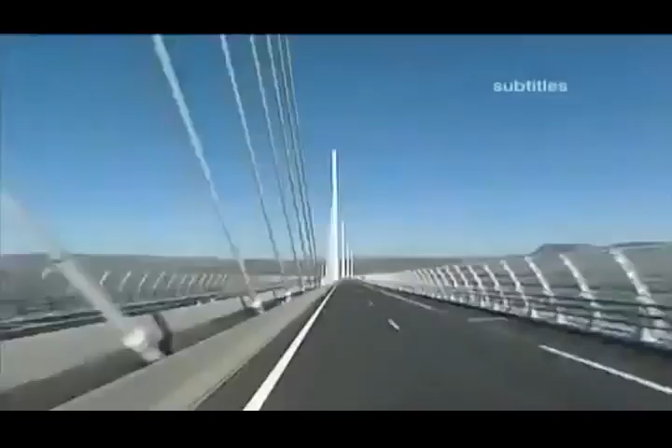This is the Millau Viaduct, the tallest bridge in the world. Its highest tower stretches a staggering 343 meters. You fly across this bridge. Literally, you are above the clouds. But this is a megastructure they said couldn't be built. When I first showed the drawing of this bridge, they really thought I was crazy.

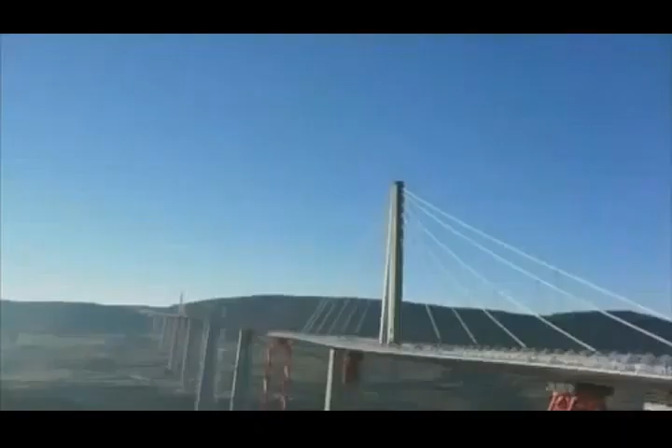The team attempting to build this amazing freeway in the sky had to survive landslides, fight winds gusting at 130 kilometers an hour, and weather massive storms as the bridge simply hung in the balance. It's a bridge that pushes the boundaries of engineering to the limits, and then beyond.

Imagine building a series of Eiffel Towers, then slinging a 4-lane highway between them, all the way across one of the deepest valleys in France. Impossible though it sounds, that pretty much describes the building of the Millau Viaduct.

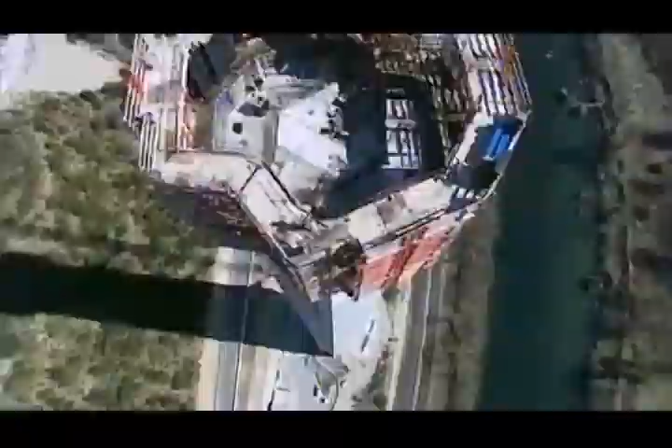From the start, the construction team faced 3 daunting challenges. 1. Build the tallest bridge piers in the world. 2. Put a 36,000-ton freeway on top of them. And 3. Erect 7 steel pylons, each weighing 700 tons.

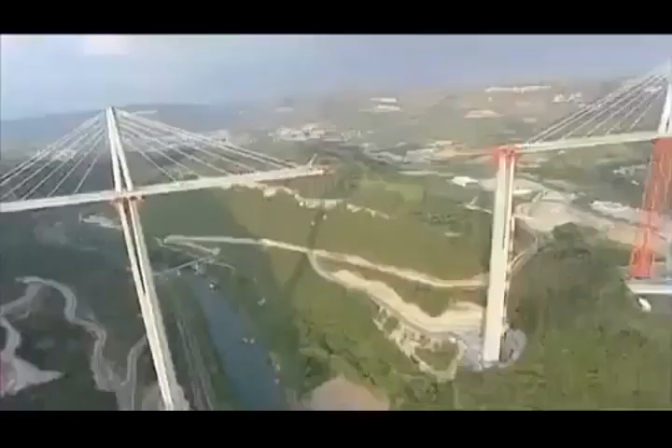And what's more, they had to do this hundreds of meters above solid ground. So high that if you're on the 86th floor observatory of the Empire State Building, you'd still be looking up at this amazing bridge.

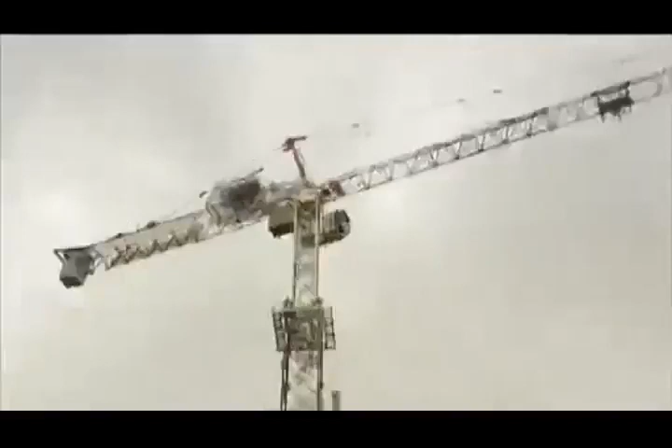October 2001, the team break ground. They're required to build a bridge that will last for 120 years. And to win the contract, the team promised to build it in record time, less than 4 years. To up the ante, any delay will cost them $30,000 a day in penalties.

There are 7 piers that are numbered from the northern end of the valley. Number 1 will pose problems because of the steep slope. Number 2 will be the biggest challenge since it's the tallest. Crossing the river, number 3 is not much shorter. Then 4, 5, 6 and 7 find the gentler slope to the south.

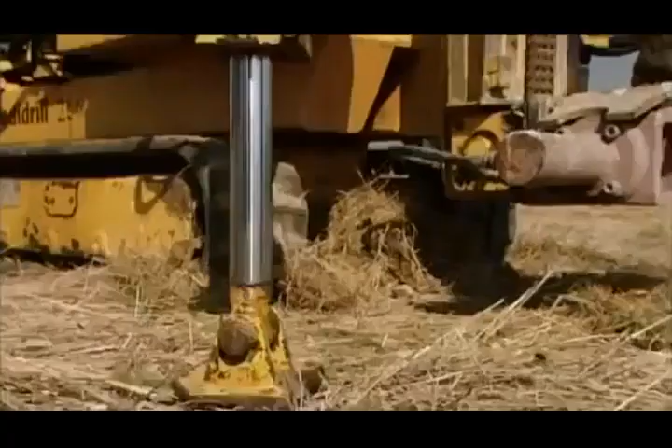To begin, the team had to bury the foundations deep in the bedrock in order to support the enormous weight the bridge will place on them. But the forces of nature were stacked against them. Geologists have warned of the risks posed by the region's fractured limestone. The rock is full of cavities, cavities that are essential to the local cheese economy.

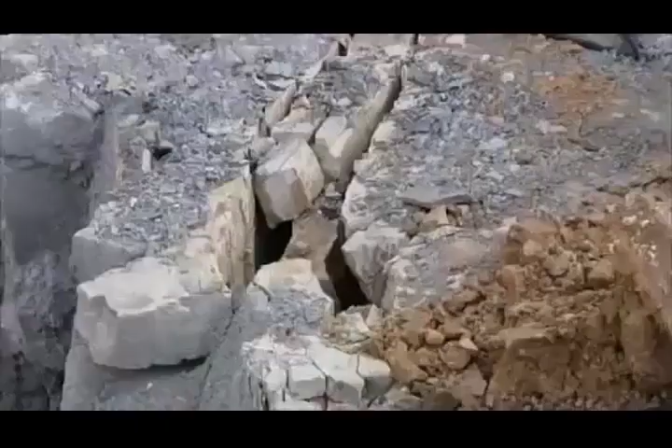These cave systems, close to Millau, are home to a unique bacteria responsible for the blue mold in the world-famous Roquefort cheese. But what's perfect for cheese could be disastrous for a megastructure. The geologist's diagnosis spelt one thing: landslides. This kind of catastrophe could jeopardize the entire project. Despite the warnings, building went ahead as planned.

Then, well into construction, as predicted, a dramatic storm causes a landslide. 4,000 cubic meters of rock collapse around Pier 1. Fortunately, the fallen rock doesn't damage the pier, but the warning is clear. They're forced to divert precious manpower and equipment to stabilize the slope and prevent a repeat collapse.

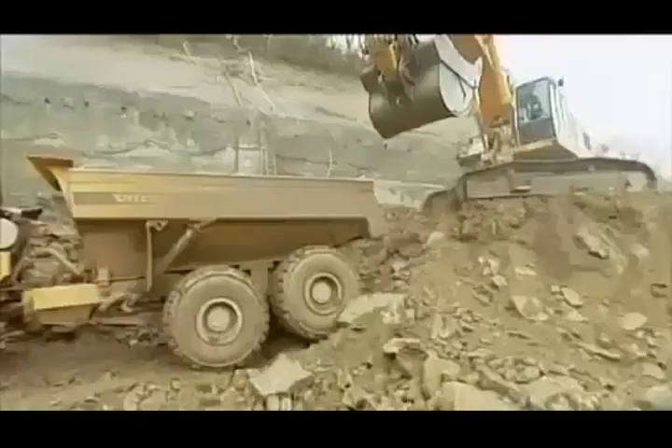So if the area is prone to landslides, why did they build the world's tallest bridge here in the first place? The answer is simple. In the 1980s, France built a freeway linking Paris directly with Spain. This major artery headed south across the French countryside, while from the Mediterranean, the freeway headed north, until they both hit one of the deepest valleys in France and stopped dead.

Welcome to Millau, France's least favorite bottleneck. The town of Millau is in the mountainous region of the Massif Central, one of the most tranquil parts of France. But in summer, this poor medieval town suffered traffic hell. The locals couldn't take it anymore. Neither could their mayor. It was terrible for our reputation. When you hear every day on the television and radio, avoid Millau, there's a traffic backup, a 5-hour wait in Millau.

It's clear the bridge was needed. But it took the French government a very long time to get round to building it. 12 years before construction began, up in Paris, the Ministry of Transport first came up with a plan. Their head bridge builder, Michel Virlogeux, is no ordinary engineer. He's a man who thinks big, very big.

France's Millau Bridge would not only be the world's tallest, it would be unlike any bridge ever constructed. When I first showed the drawing of this bridge to the authorities, they really thought I was crazy. Virlogeux's Normandy Bridge has 2 sets of cables supporting the deck. But he wanted to up the stakes for Millau by losing 1 row of cables, so the remaining line would be forced to do twice the work.

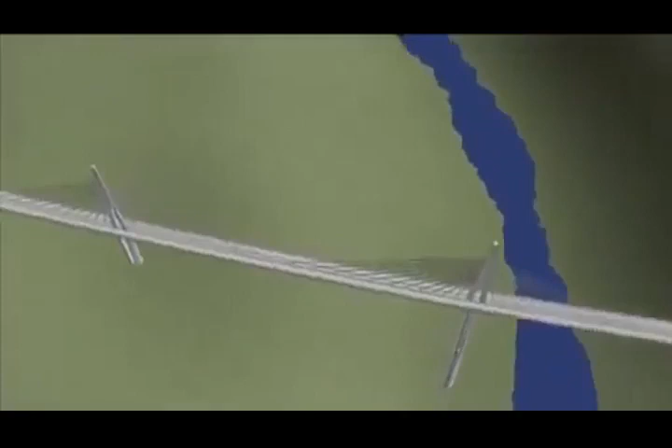More dramatically, the 2.5-kilometer Millau Bridge, instead of having a single main span, needed a whole series of piers to support it across the valley. No one had ever attempted a multiple-span, single-line cable-stay bridge on this scale before.

The French authorities had a problem. Nervous about Virlogeux's groundbreaking scheme, they held a competition inviting other engineers and architects to compete with different designs. The winner, Lord Norman Foster, is one of the world's superstar architects. In Hong Kong, he built the world's largest airport terminal. In Barcelona, offices literally hang from a mast on his communications tower. This is a man who regularly contemplates the impossible and delivers.

You know, it's the challenges. And it's one challenge on top of another, on top of another. And with Millau, one of the biggest challenges was making it fit into the landscape, given it's just down the road from the famous Gorges du Tarn, France's equivalent of the Grand Canyon. How do you make something which has to be so immensely strong against the forces of nature look very gentle, very delicate? How do you weave something on that scale into the most unbelievable landscape?

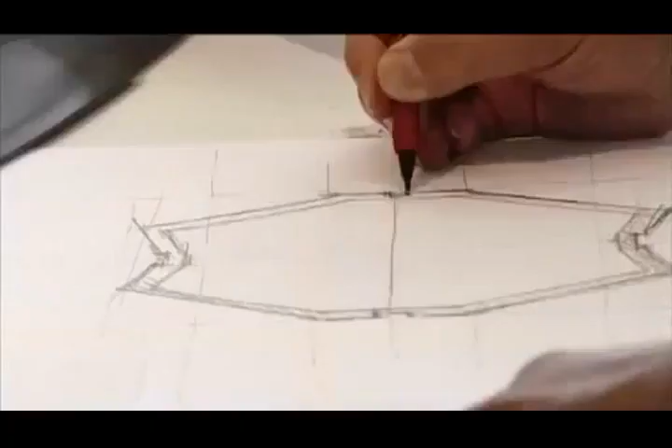Ironically, Foster's answer was to take Virlogeux's pioneering scheme, then push it 1 stage further. He turned an elegant piece of engineering into a delicate work of art by boldly cutting out 2 of the 9 original piers and seriously slimming down the remaining piers and road deck. Foster wanted the bridge to appear as delicate as a butterfly. But this butterfly has to support the weight of 5 Eiffel Towers in gale-force winds hundreds of meters above the River Tarn.

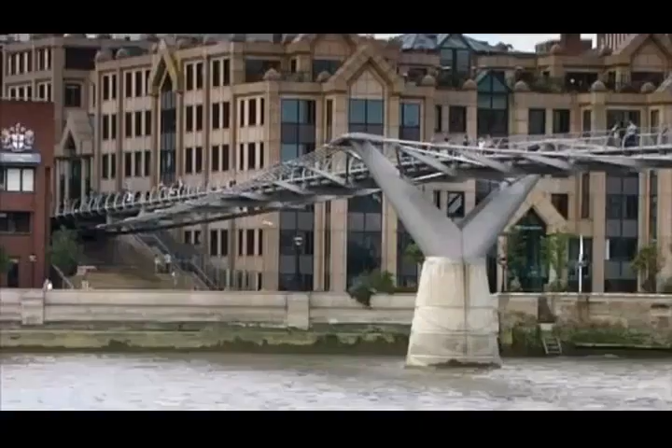Then, with Millau still on the drawing board, Foster's record as a bridge builder suffered a major setback. His Millennium Bridge in London is actually another record-breaking structure, the lowest profile suspension bridge in the world. But when this footbridge opened to the public in June 2000, it was a public relations disaster. Crowds walking over it set up a resonant frequency, and the bridge began to sway. As people adjusted their step to the small initial wobble, the effect was magnified.

Though it didn't threaten the structure, the swinging motion became so dramatic, the authorities closed the bridge for a refit that took 1.5 years and ended up costing over $8 million. It was a bad omen for the Millau Bridge, where construction was soon to begin. And at 15 times the height, a design flaw would be a catastrophe.

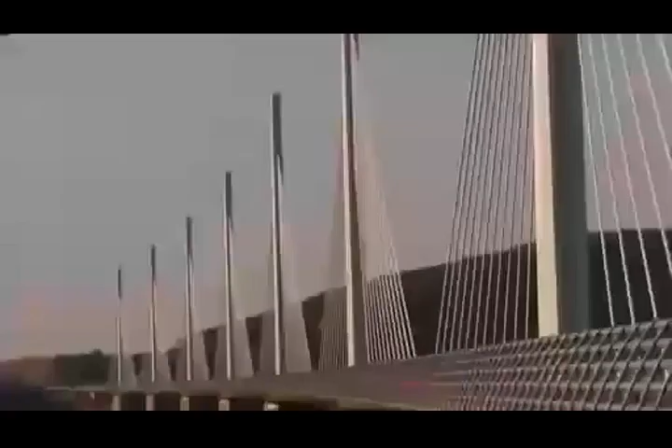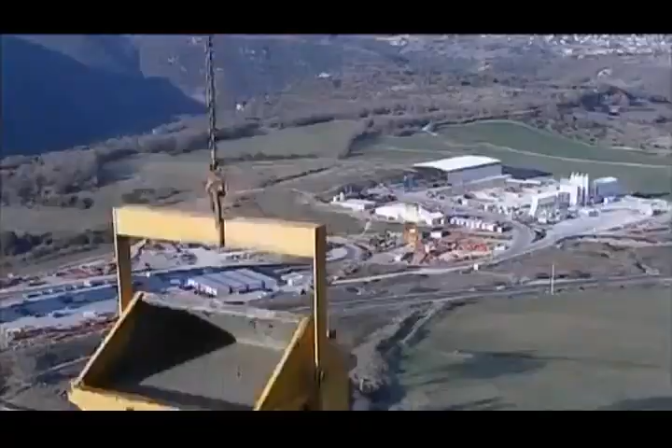December 2001, France's Millau Viaduct, the tallest bridge in the world, is under construction. Everything about this project is supersized. It'll need 200,000 tons of concrete, so much that the team have to build a concrete factory on site. But there's nothing straightforward about this concrete. The formula must be just right. It needs structural strength to support the massive loads it'll have to bear. But it can't set too quickly, as it has to be hoisted into position and poured hundreds of meters in the air. And it needs to be just the right color to suit Norman Foster's vision.

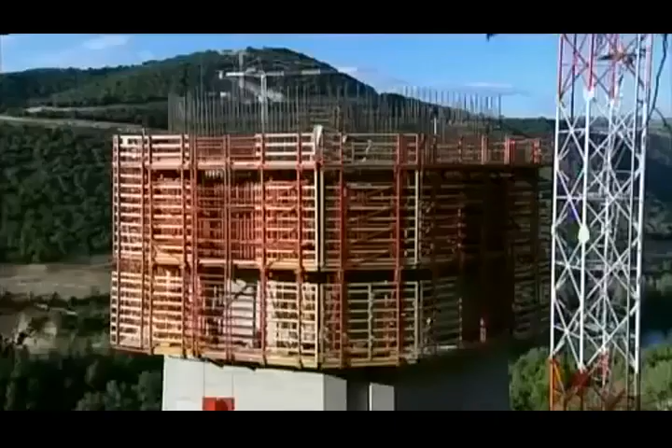In fact, the architect's vision has created a headache for the construction team. He's designed each pier as a complicated geometric shape, tapering the entire way up with vertical grooves set into them to create shadows. But what's just a line on paper for the architect was a major challenge to build. The enormous piers are built step by step by pouring concrete into a temporary mold. To give the required strength, the molds are filled with a frame of steel reinforcing bars. In total, 16,000 tons of these steel bars are hoisted into place and secured. Laid end to end, they'd stretch the 4,000 kilometers from Millau all the way to Central Africa.

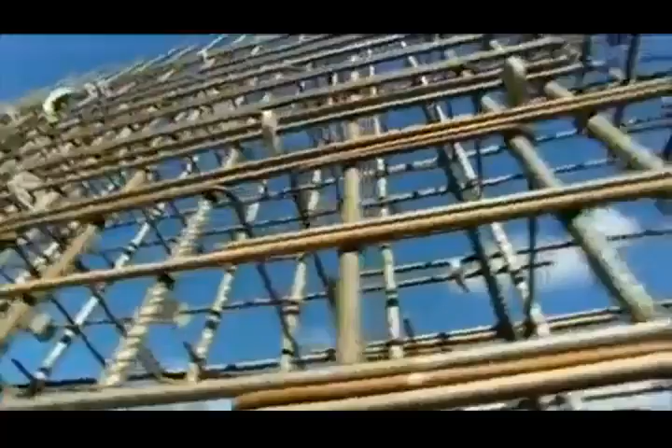The shape of each pier is seriously complicated. As a result, each time they remove the sections of red steel shuttering, they have to change the shape of the mold to fit the profile of the next 4-meter section. Manhandling these steel panels weighing up to 15 tons apiece is no picnic. And with the combined height of the 7 piers totaling well over 1 kilometer, they have to change the shape of the mold over 250 times.

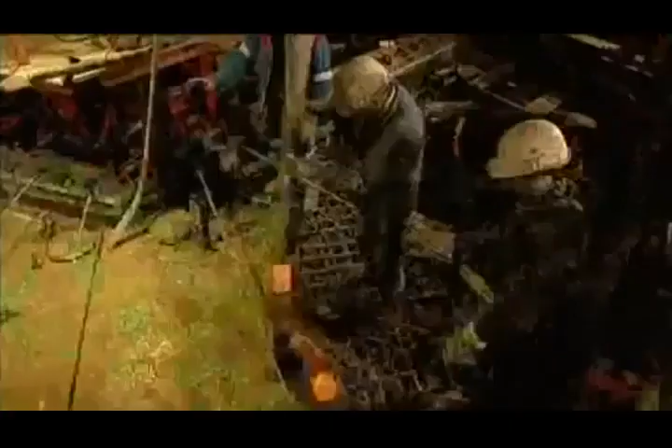Every 3 days, each team on each pier went through this whole cycle. Then they repeated the process. But it was a race against time, with a permanent threat of delay. Keeping the entire build on time and to budget was the daunting responsibility of one man, Jean-Pierre Martin.

If instead of 3 days we took 4, imagine that multiplied by the number of castings. We'd end up with a 3 or 6 month delay. With a penalty of nearly $1 million a month, this isn't something Martin wanted to contemplate. And this schedule wasn't his only headache.

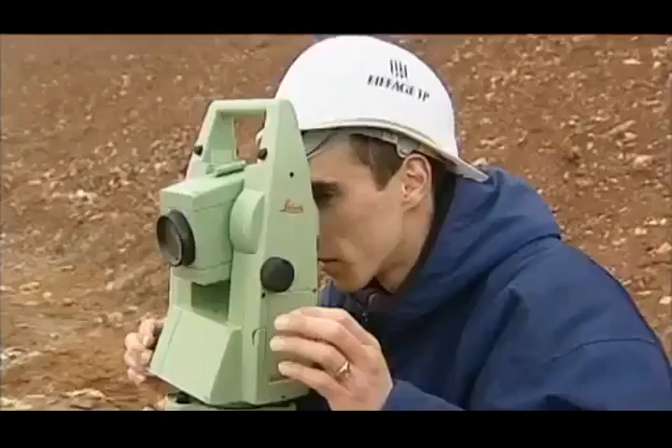You have to be pinpoint accurate when you're building the tallest bridge piers in the world. Get it wrong, and the bridge simply won't fit together. Just 10 centimeters out, about a hand's width on each 4-meter section, and the tallest pier could be 6 meters off at the top.

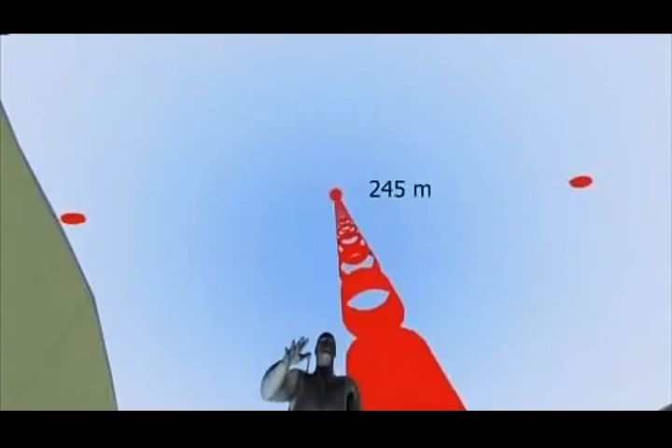Each team was aiming for a specific point in the sky. For Pier 2, this was exactly 245 meters above the ground, 546 meters from the north side, and 1,914 meters from the southern end. There was no room for error.

The only chance they had to get it right was with GPS, accurate to within 4 millimeters. Using signals from multiple satellites, the team could pinpoint their position and make sure they're on target for that critical point in the sky they needed to hit.

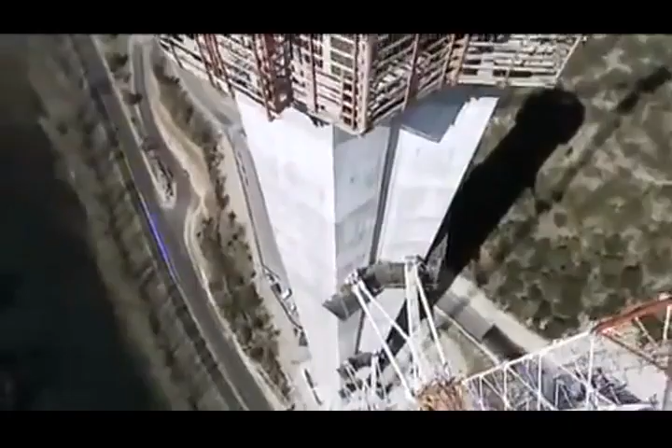Month after month, the piers climbed higher. Finally, by November 2003, they reached their full height. At 245 meters, Pier 2 becomes the highest bridge pier in the world. But is this record-breaking pillar where it's supposed to be? Amazingly, it's dead on target to within 2 centimeters.

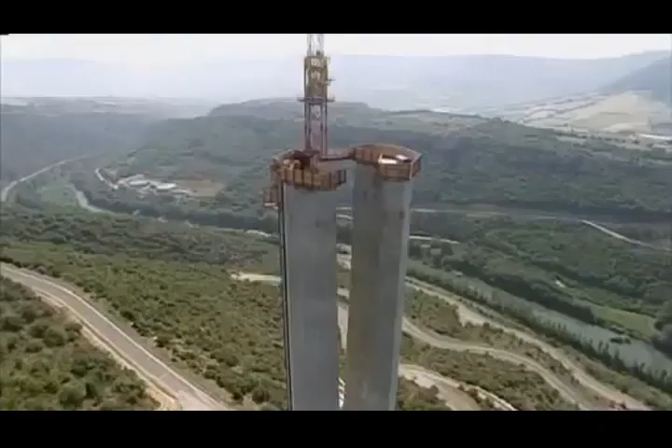Champagne corks pop. It's time for a major celebration. Against all the odds, they were 1 month ahead of schedule, but the team couldn't afford to relax. The next stage of the project would be the most difficult part of the build.

Phase 2 of building the world's tallest bridge involved putting a 2.5-kilometer roadway weighing 36,000 tons on top of the piers, a full 270 meters above the River Tarn. Bridge builders know danger comes with the territory, but working at these heights can be lethal.

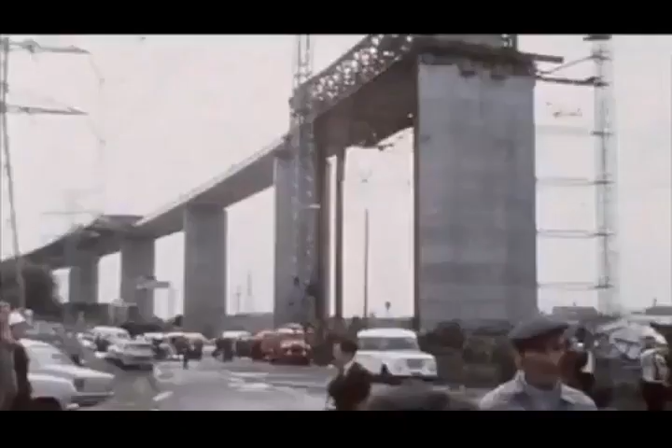More than 34 died constructing New York's Brooklyn Bridge. 35 died in 1970 on the Westgate Bridge in Melbourne, Australia. And 1 year later, 13 workers were killed when the Koblenz Bridge in Germany collapsed into the Rhine.

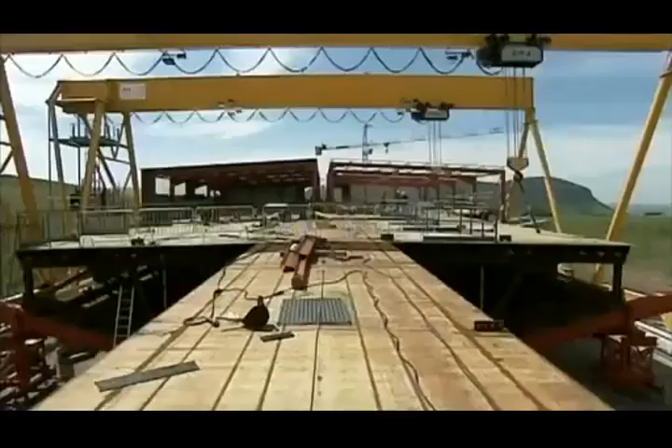With these fatalities in mind, the team decided to fabricate the entire road deck on the safety of solid ground. This meant building it in steel, which in theory would be much safer than lifting vast concrete sections hundreds of meters into position. There's only one problem with this plan. No one had ever put a road deck on piers anything like this height before, let alone over a 2.5-kilometer span.

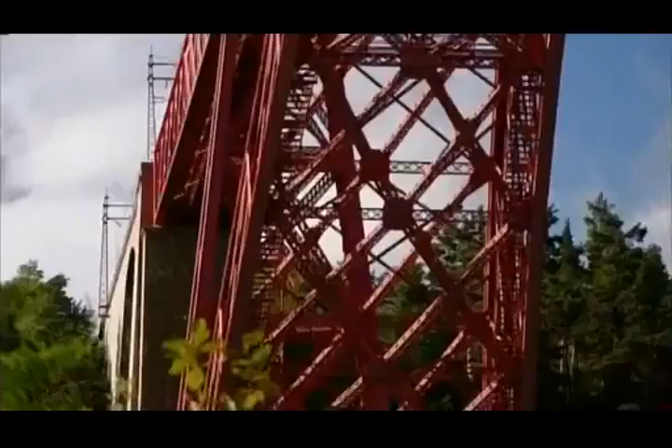In the end, only one steel manufacturer had the courage to take on this colossal challenge. Eiffel, the steel firm set up by the great French engineer. Eiffel built what was once the tallest bridge in the world, the Garabit Viaduct in southern France, before getting round to the framing for New York's Statue of Liberty and, of course, his signature tower in Paris. But despite the company's experience, Eiffel's director, Marc Buonomo, knew he was taking a serious risk.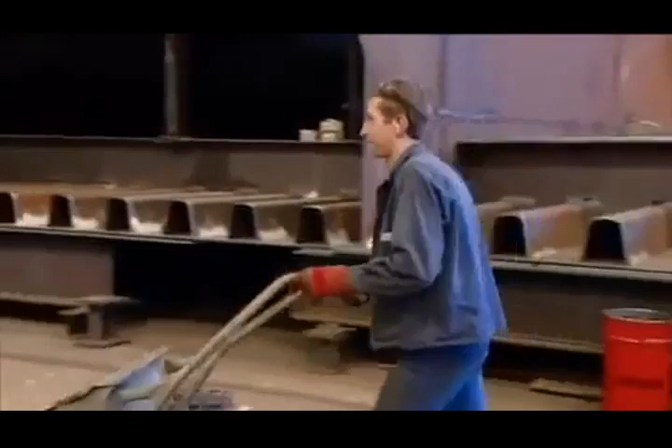They fabricated the massive sections that would make up the road deck in the company's steel factories. This immense jigsaw puzzle involved manufacturing 2,200 separate sections, weighing up to 90 tons and some of them 22 meters long. Their accuracy is measured with a laser to within a fraction of a millimeter.

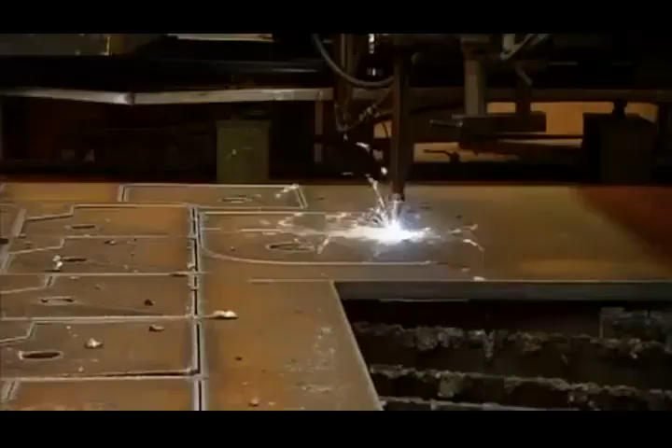Each cutting pattern or template is programmed into the computer. Then the machine automatically blazes its way through the steel. The torch reaches a scorching 28,000 degrees centigrade. That's 5 times the temperature of the Earth's inner core.

But cutting and welding was the easy part. The hard part was getting these monster sections the hundreds of kilometers from the factories to Millau. The routes had to be planned with precision to avoid major damage. The police coordinated safety and clearances.

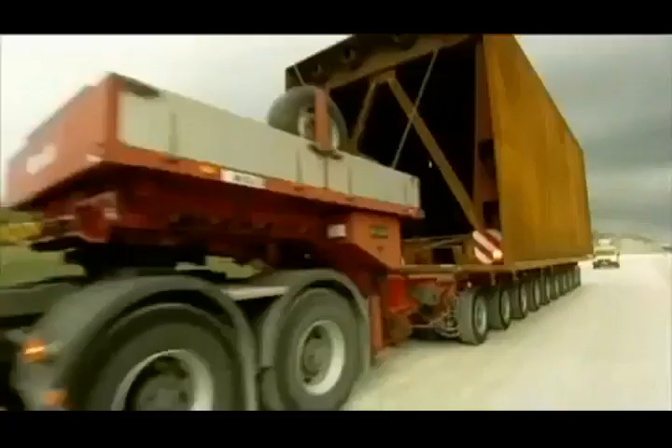Even with that level of preparation, some obstacles felt as if they're cutting it just too close for comfort. And this was no one-off event. To build the viaduct took over 2,000 of these extraordinary road convoys.

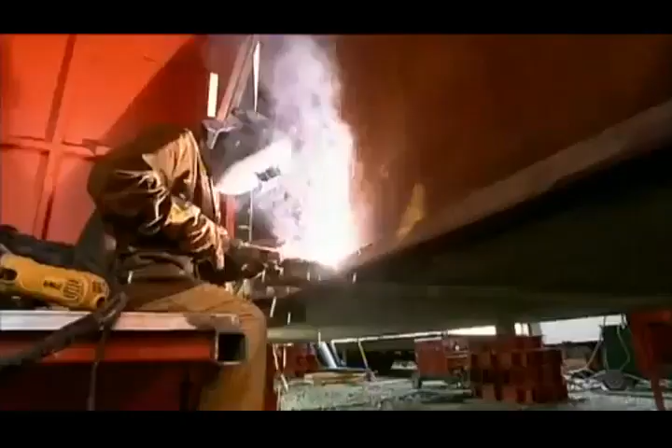The components arrived at assembly plants set up, one on either side of the valley. Here, the pieces of the massive jigsaw puzzle were welded together to form the two halves of the deck. But getting these two halves to span the valley on top of the world's tallest bridge piers would be a major challenge. They'd be the first team to put a road deck on a pier taller than an 80-story skyscraper.

And pushing bridge building beyond anything attempted before, they planned to slide the entire 2.5-kilometer road deck over in two colossal pieces. The bridge's chief engineer, Jean-Marie Cremer, was one of the few people who believed it could be done. All the engineers who know this method, who were in the know, didn't believe it was possible. If the team had got their calculations wrong, the entire structure could collapse into the valley.

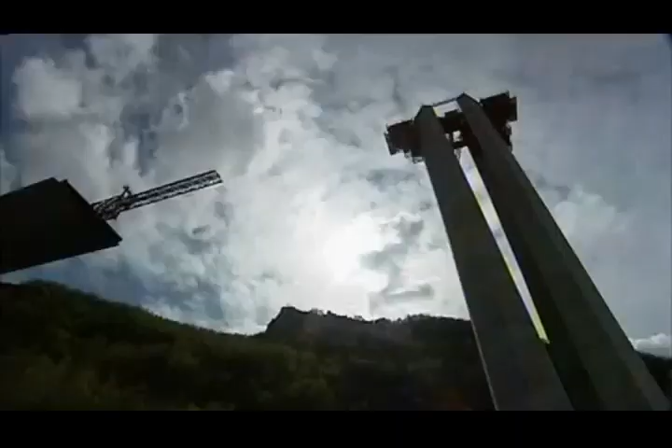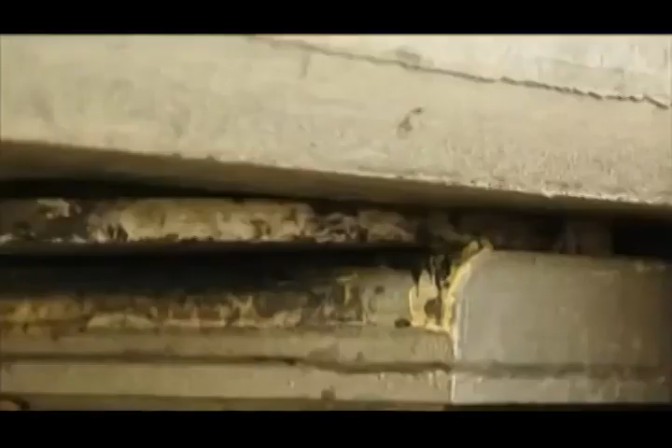We found a solution for the construction, which was to launch the bridge from the two sides. One part on the Larzac Plateau, one on the Rouge Plateau. And to push them from the two sides and to make them come and meet here above the River Tarn. Smaller bridges use a similar technique. A powerful set of hydraulic rams literally pumps the deck from one side to the other.

But Millau would be the longest launch ever attempted over the highest piers in the world, and the results could spell disaster. The deck is so slender it would bend and collapse if it were pushed out over the 342-meter spans between each pier. The furthest anyone's previously managed is less than half that distance. The first part of the solution was simple. Fit a pylon so its cables support the front of the deck as it goes out over the valley. Then construct temporary steel support towers that halve the spans to a more manageable 171 meters.

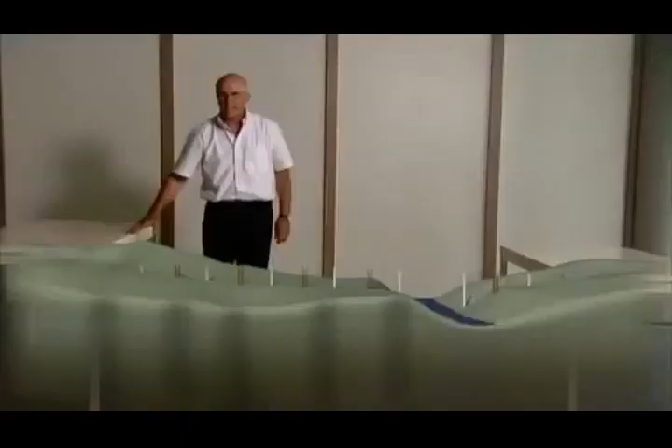These steel towers were a construction feat in themselves. The largest, over 170 meters high, is the tallest ever built, and they needed to carry a massive load. 7,000 tons as the leading edge of the deck, together with the first 90-meter pylon, slide over. Simply pushing this enormous weight over the top of the vulnerable piers would bring them crashing to the ground. If we'd done a conventional launch, we would have knocked the piers over like the pins in a bowling alley.

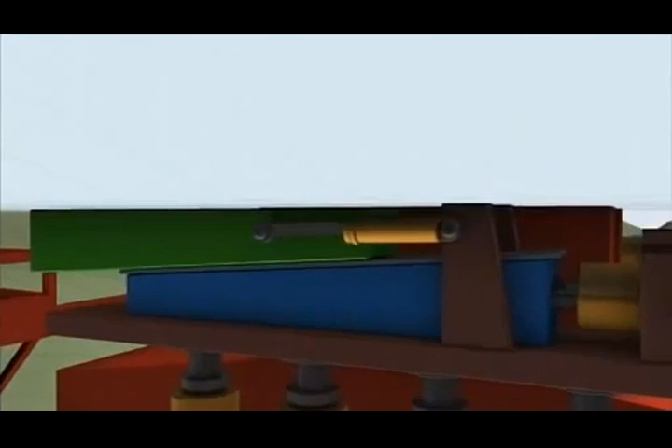So two of the team reinvent the way this type of bridge is built. Marc Buonamo with Jean-Marie Cremer. The trick is to use a series of these launching systems to jack up the deck and inch it forward. Each system uses two wedge-shaped blocks under each side of the deck. The upper wedge is pulled forward by a hydraulic ram. It slides up the slope of the lower wedge at the same time, lifting the deck from its supports and advancing it 600 millimeters. The lower wedge then retracts, dropping the deck onto its supports. The upper wedge returns to its original position, and the whole cycle begins again.

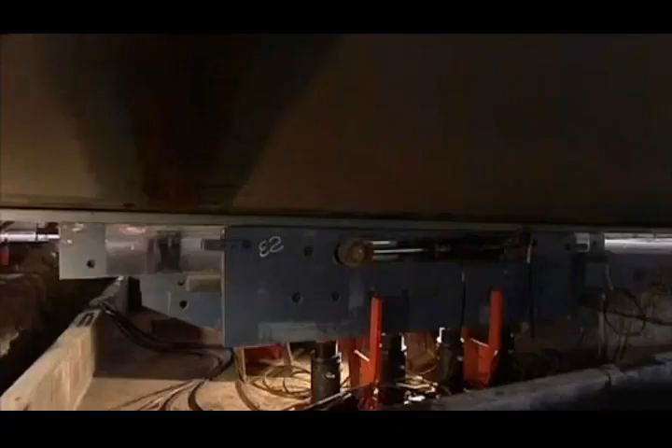4 of these clever devices are placed on each pier, all programmed to work at exactly the same time. The result is that together, they pick up the entire roadway and shunt it forward. But if one fails or gets out of step, it could spell disaster. The force could push the bridge piers apart till they collapse. When you're up there and you see Millau 300 meters below you, you ask yourself, was this a good idea? The future of the entire project was now hanging on a prototype, and it had never been tested.

It's the morning of February 26, 2003. Do or die day for the world's tallest bridge. Everything is about to be put to the test. The flexibility of the deck, the strength of the temporary piers, and critically, the pioneering hydraulic ram system. Even Buonomo, the man in charge of the launch, had his doubts. As it had never been done before, I have to tell you, I had fears that it wouldn't work.

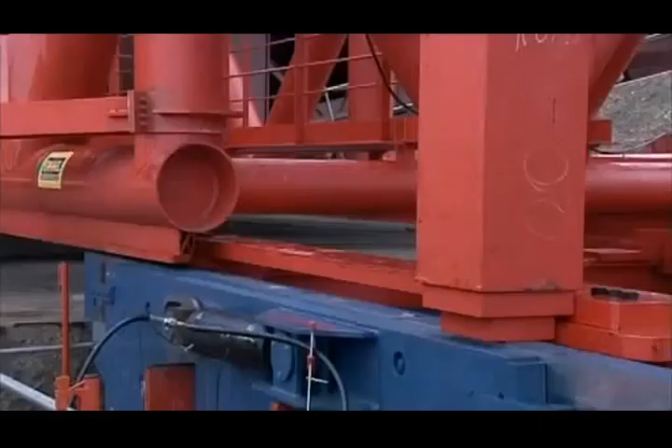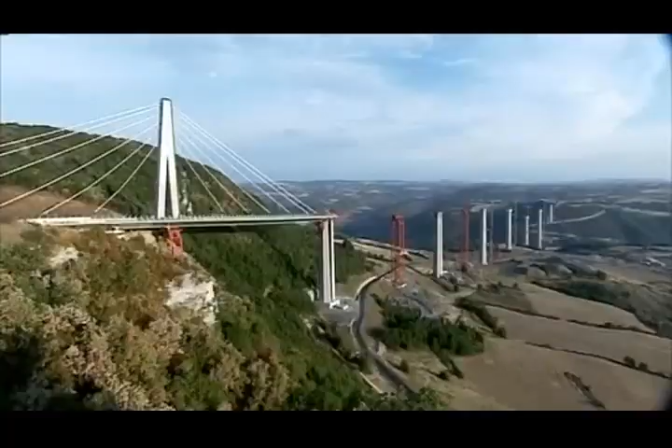The pumps kick in, the pistons start to push, and the deck begins its huge journey across the valley. The moment I heard the motors start, I put my finger on the deck, and I could feel my finger move. Every 4 minutes, the deck advanced 600 millimeters across the valley. Surveyors tracked its progress. But it was still a nail-biting time as they watched the unsupported deck crossing the void. Eventually, the deck reached the safety of the first pier. 204 meters down, only 2,256 to go.

The launching system seemed to be working as planned. The engineers were feeling optimistic. But as the deck advances into space, it'll become more vulnerable to the wind, which can reach 130 kilometers an hour. Unfortunately, the road deck has the shape of an upside-down airplane wing, and the team's greatest fear is that this wing could simply take off.

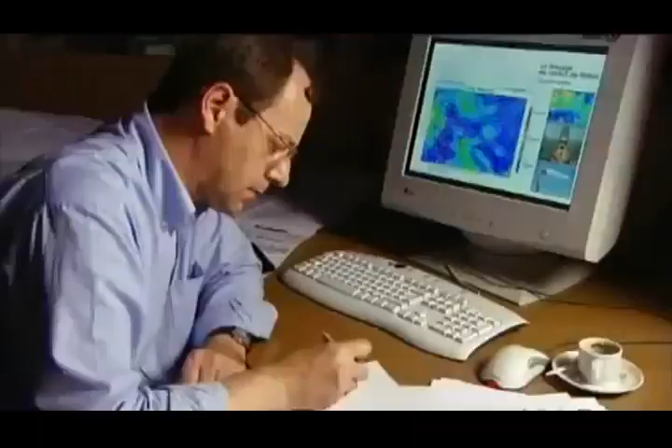The engineers kept a close eye on the wind and weather conditions. When they were satisfied there was a 3-day weather window and the wind wouldn't exceed 85 kilometers an hour, they'd give the construction team the go-ahead, and the deck launch could continue. The reason for this precaution is simple. Strong winds can literally tear a bridge apart.

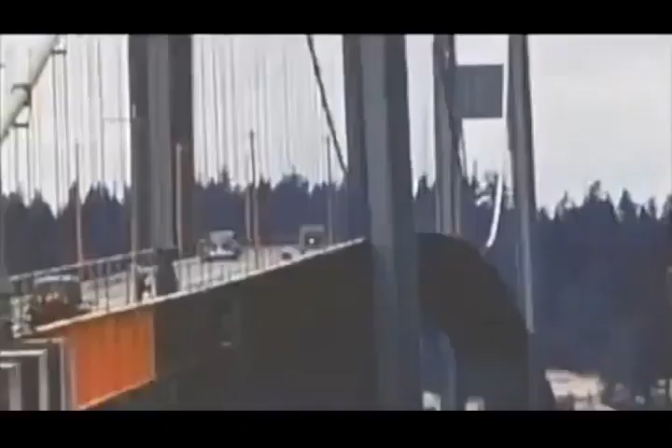In 1940, Washington State built a suspension bridge across the Tacoma Narrows in the US Northwest. It opened with a grand ceremony on July the 1st. But the celebrations were short-lived. The bridge had a major problem: the wind. Girders beneath the deck, designed to make the bridge rigid, actually blocked the wind, causing the roadway to ripple alarmingly. Locals soon dubbed it Galloping Gertie.

On the 7th of November, with the wind less than 70 kilometers an hour, the bridge begins to twist violently. At 11 a.m., time runs out for Galloping Gertie. The wind sends the bridge crashing into the river. Wind tunnel testing is now standard procedure as a direct result of Galloping Gertie.

For the Millau Bridge, they analyzed the wind in the Tarn Valley over 18 months, then recreated those conditions in the wind tunnel. Wind engineer Olivier Flamand was shocked by the results. The average wind speed was relatively low, but because there's such strong turbulence, it created very fast peak winds. The rugged terrain creates serious turbulence at the height of the road deck. Winds peak at 130 kilometers per hour. That's hurricane force.

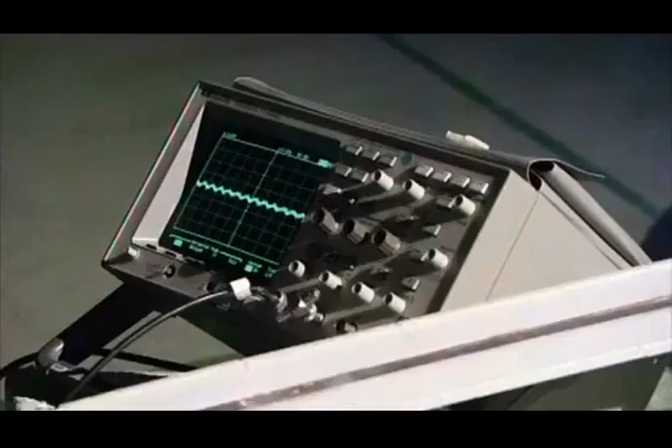They tested every aspect of the bridge to analyze the risks: piers, pylons, and critically the deck. But it's not just the aerodynamics of the finished bridge. They needed to find out how it would behave when it was most at risk, during the launching of the deck. Olivier and his team reached a chilling conclusion. The winds they've measured are strong enough to blow the unsecured deck off its supports and send it crashing hundreds of feet to the valley floor.

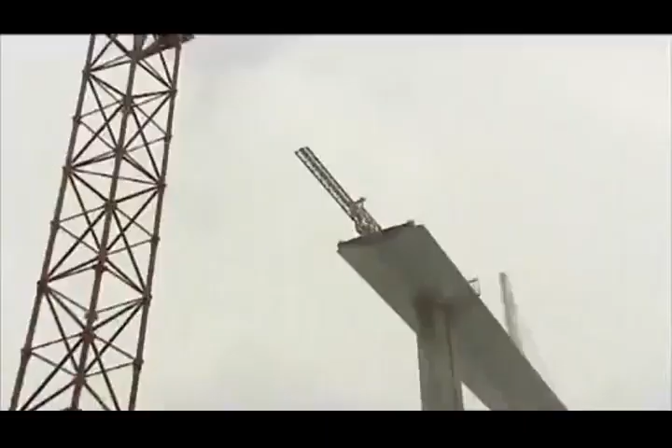And then the nightmare began. On the 22nd of August 2003, 6 months into the deck launch, one of the launch systems failed, leaving the deck hanging in the wind. To make matters worse, the weathermen were predicting storms. So far, these massive pumping machines had worked perfectly. But the fact is they were prototypes, and due to the frantic schedule, they'd never been tested.

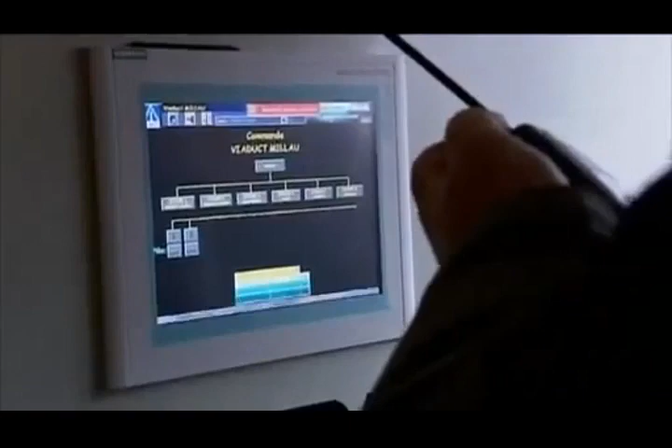The problem was that the non-stick Teflon between the sliding surfaces had ripped, and the friction generated was too much for the hydraulic rams to push against. Unfortunately, no one had planned on replacing parts of this monster machine mid-launch on the top of a massive concrete pillar. This was very bad news for the man who staked his reputation on this system. It was maximum stress, like poison in your mouth. You don't forget that.

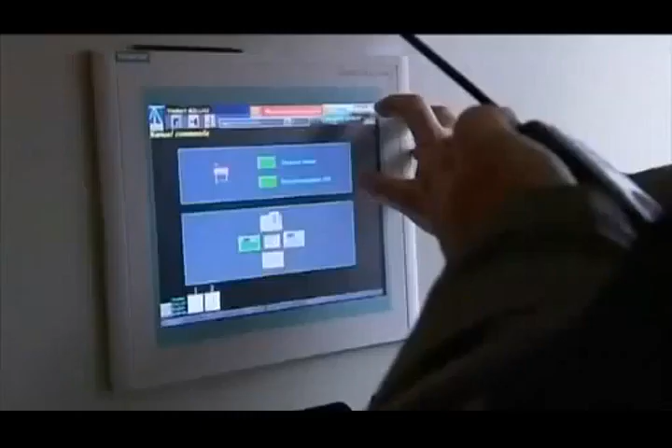Re-examining their calculations, they realized the cause of the problem. They'd underestimated the forces between sliding surfaces, but they wouldn't be able to repair it without the necessary spare parts. The clock was ticking, and Marc Buonanno needed a solution fast. When Apollo 13 came back with that incident, the NASA engineers requested they did the inventory of everything there was on board to know how to fix it.

The Millau team did an inventory. They realized that the other launching machines, not yet being used, could be stripped to provide the new Teflon surfaces they needed. Working all through the night, the team extended the access platform. This allowed them to take out the 5-meter-long, 2-ton steel wedges, replace the Teflon, and reassemble the launching machine. By 8 a.m. the next morning, it was ready to resume the launch.

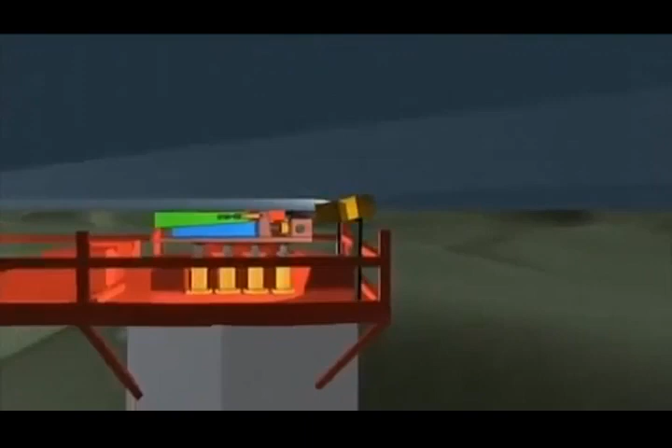The rest of the week, the predicted storms arrived, and another set of launching machines wore out. So when the deck finally made it to the safety of the next pier, the team breathed a major sigh of relief. You don't forget that. I won't forget that for 4 hours I was really scared. The two decks continued their journey across the valley. Day after day, week after week for a full 14 months, they approached each other, millimeter by millimeter.

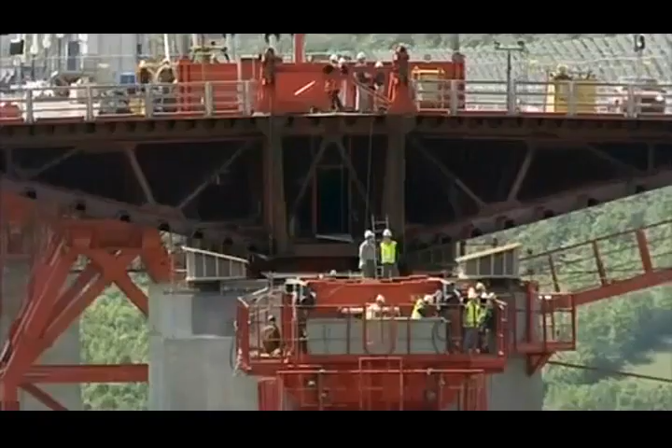By May 2004, they'd reached a critical phase. From the northern end, the shorter deck had traveled 717 meters into space to reach its final resting place. From the south, the longer deck extended over 1.5 kilometers. Only the section over the river, the one point where it was impossible to erect a temporary pier, divided them. But would they meet as planned? If they've got their calculations wrong, they'll have built the biggest white elephant in Europe.

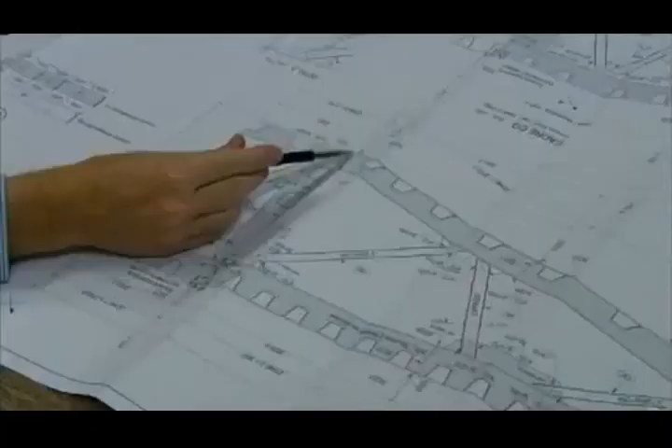Even the man behind the whole project had his doubts. I was not convinced at all that the two parts of the deck could meet exactly with a perfect geometry. The odds were against them. Calculating such a feat so precisely is a Herculean task. Firstly, the two starting points on the northern and southern slopes of the valley are at different heights. Secondly, the bridge has a subtle curve to it.

As a result, each steel panel which makes up the road deck had to be cut and welded with extreme precision. It would be an engineering triumph if they got these two sloping curved decks to meet as required. The team checked the weather reports. With the wind inside safety limits, they gave the go-ahead for the final push.

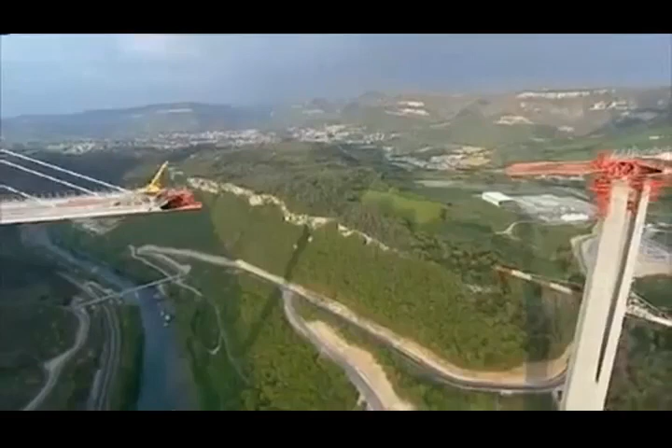The rams began to drive the deck's leading edge off the safety of Pier 3 towards its destination. At this point, a total of 21 launching systems needed to move at exactly the same moment to avoid disaster. If anything were to go wrong now, the man responsible would be Marc Buonanno. Everyone asked me, how can you be sure that it will go straight? So to be sure that they were going to the right place, I had a GPS put on the front, so I could see the gap between the theoretical and the real position.

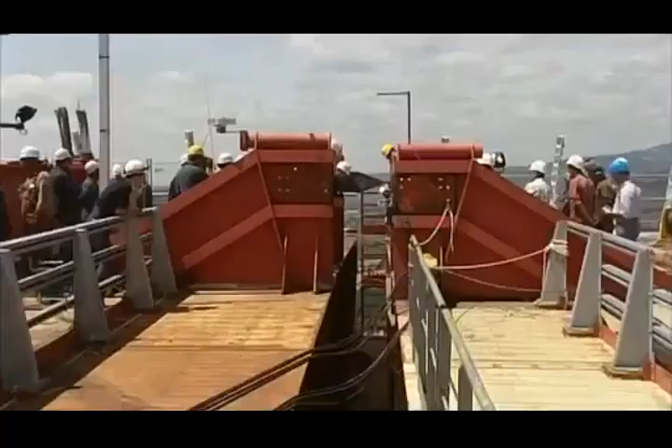Over the next 2 days and nights, the deck advances 600 millimeters at a time towards its final resting place. The world's media are watching the critical meeting of the decks, and to add to the pressure, the French Prime Minister is due to drop in to celebrate the event. The deck pushes forward. Now, with only centimeters separating the two sections, a magnum of champagne is hung between them to mark the moment.

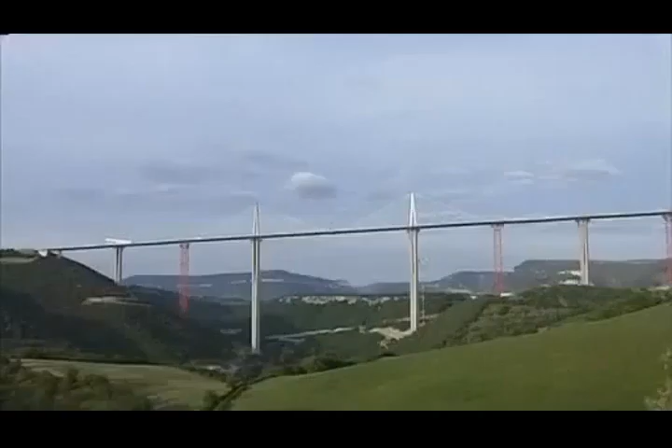At last, union. The two massive steel decks have traveled high over this valley, a total of 2.5 kilometers, and when they check, they're aligned to within 1 centimeter. That's accurate to within 99.9999%. All the measuring, all the calculations have paid off. They've nailed it.

The meeting of the decks was a special moment. News reports traveled round the world, and in Salzburg, Austria, they reached Felix Baumgartner, aka Felix the Conqueror. Felix has made a career base jumping from some of the tallest structures on the planet, and within 24 hours he'd driven to Millau and was calculating the logistics for the jump, factoring in his two main aims, to avoid arrest and death.

Baumgartner waited for darkness before arriving on site. He found his way to the base of Pier 2, then climbed an access ladder the full 245 meters to the top. He entered the steel road deck and found a place to hide until daybreak. He had to remain concealed until the sun was high enough for his cameramen to record his world record attempt.

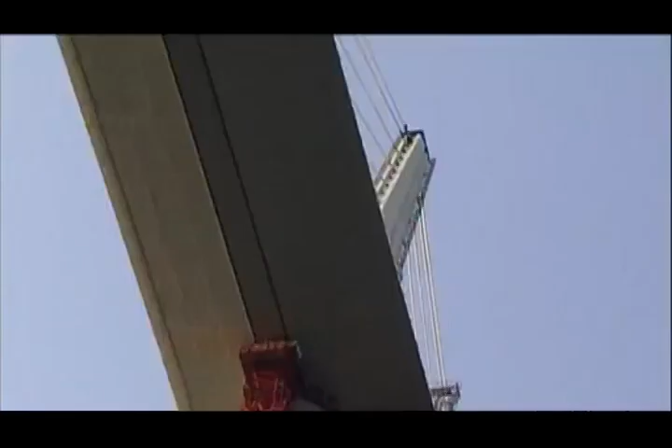At 7 a.m., Felix the Conqueror emerged. He took a cool backward flip off the tallest bridge in the world and entered the record books. The tallest bridge in the world, 250 meters. I did it. And having evaded death, he made sure he's not caught by the police.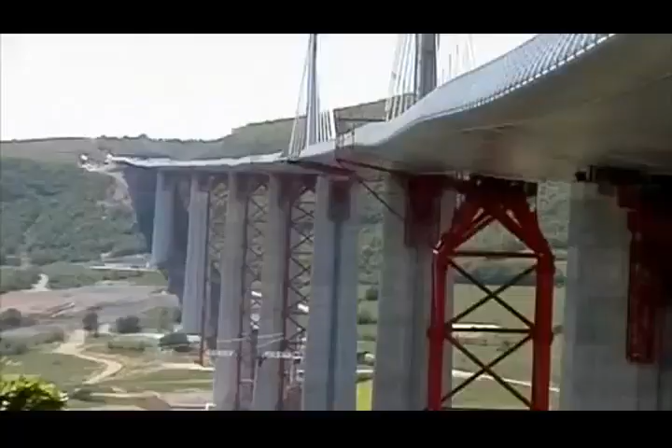The decks have been joined, and the team have reached the final phase of the project. But there was still a race to meet the schedule, and their problems weren't over yet. Everyone could see the dramatic undulations in the flexible steel deck. Even some hardened bridge builders wondered about its structural integrity. It was a huge surprise for everyone. All the engineers said, we knew steel was flexible, but not that flexible.

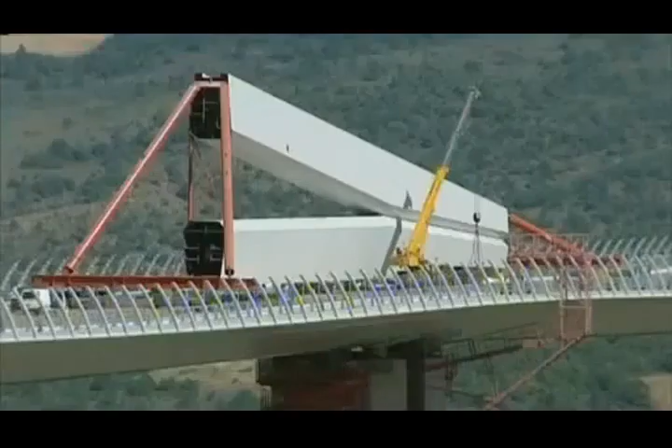The team were relying on the pylons and cables to pull the deck straight. Each massive pylon is 90 meters high and weighs 700 tons. Placing them in position on the slender deck, high above the valley floor, would go beyond anything ever attempted. Once again, Marc Buonomo had a plan. You know, the first people to make vertical pylons were the Egyptians. Buonomo adapted a technique used in ancient Egypt to erect obelisks in the sands.

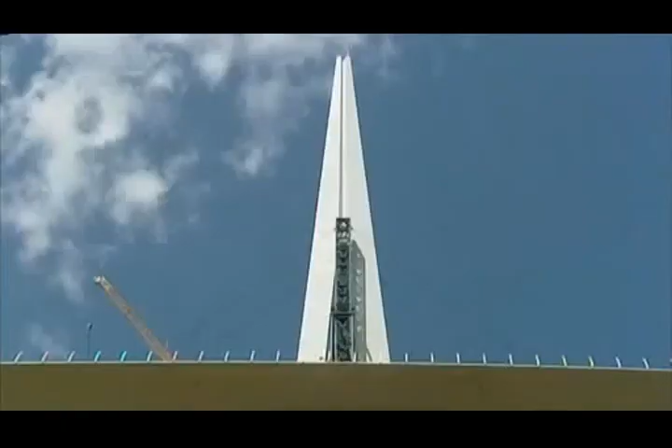On top of the road deck, the team put up two enormous steel towers, both of them secured by cables and equipped with a hydraulic system capable of raising 1,000 tons. The 700-ton pylon is then lifted by the hydraulics. As it rises, it pivots little by little until it's vertical. It's then lowered safely onto its anchorage point. Buonomo's 4,000-year-old technique worked to perfection.

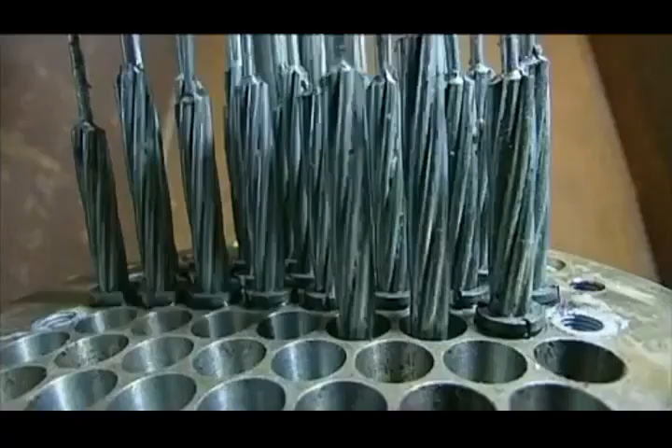With all 7 pylons in place, the team could attach the cable stays that would straighten the rippling deck and give it the strength to cope with full traffic loads. The roadway now weighs over 40,000 tons, and the 154 cable stays should prevent it from sagging or collapsing. The strongest stays are made up of 91 individual steel strands and have a breaking strength of 25,000 tons. Strong enough to hold back 25 jumbo jets, all at full throttle.

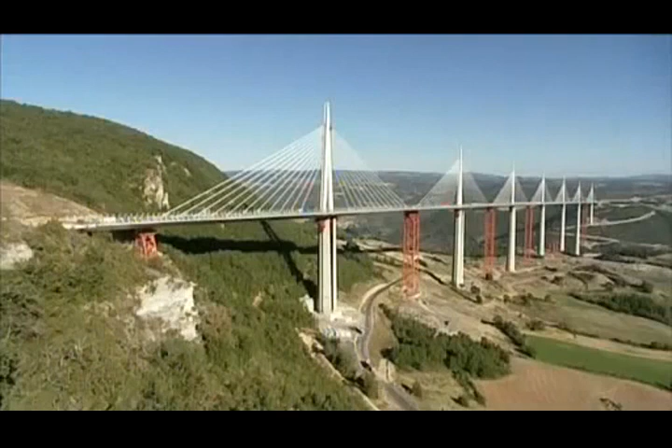As the cable stays are tensioned, true to plan, the ripples in the road deck are pulled straight. Over the 2.5-kilometre deck, the ripples are now no larger than the size of a thumb. They're finally on the home straight. The road surface goes on, adding a further 10,000 tons to the load. But before it could open to the public, the team needed to know the bridge is safe. It would have to pass one crucial test.

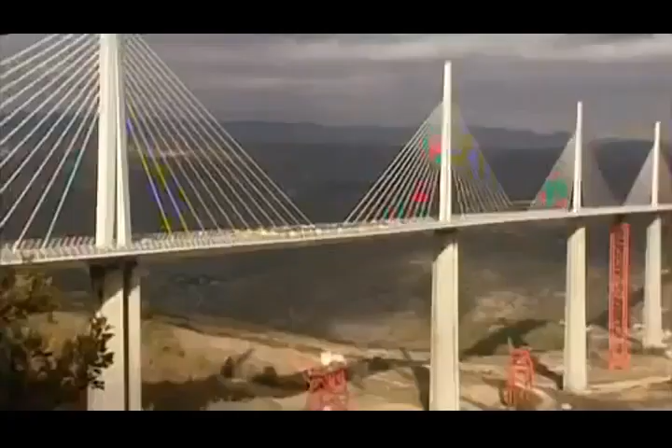After 3 years, the construction team building France's Millau viaduct, the world's tallest bridge, are about to find out if they got their calculations right. On a single-span cable-stay bridge like the Normandy Bridge, a large load on the main section is no problem, because the cables are attached to solid ground and can't give.

On the Millau viaduct, with its 8 spans, the cables are attached to the deck of the adjacent sections. A load on one section will cause it to drop, pulling the stays down. As the pylons lean in, the matching stays are pulled upwards, lifting the neighbouring decks and causing a dangerous rippling effect.

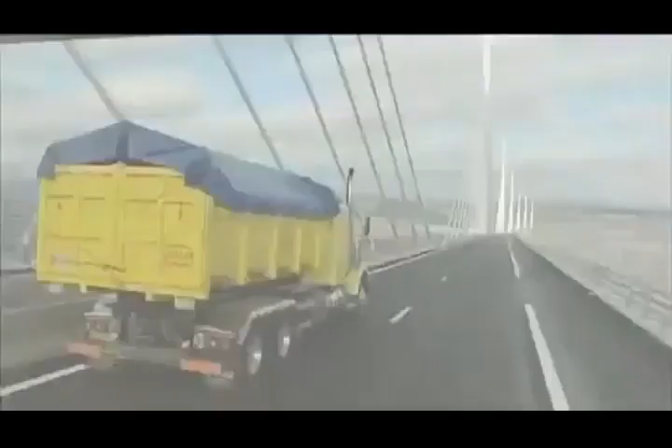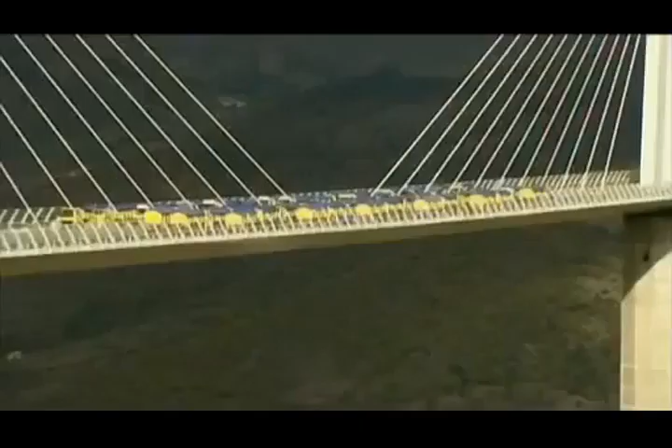It's right now the team put their bridge to the test. These 28 trucks have a combined weight of over 900 tons. They are now positioned in the critical point, mid-span. The engineers hold their breath. Measurements are taken. The span bends just 26 centimeters. This is a triumph for the engineers. The bridge was designed to cope with more than double that.

4 weeks later, on December the 14th, 2004, President Jacques Chirac officially opened the Millau Bridge. A proud moment for the whole of France. Just over 3 years of construction have produced the tallest bridge in the world, designed to last at least 120 years. And against the odds, the project manager even brought the job in on time. But that's not what he's most proud about. What I remember, because on construction sites there are often accidents, is that we had no serious accidents, nothing more than a minor injury.

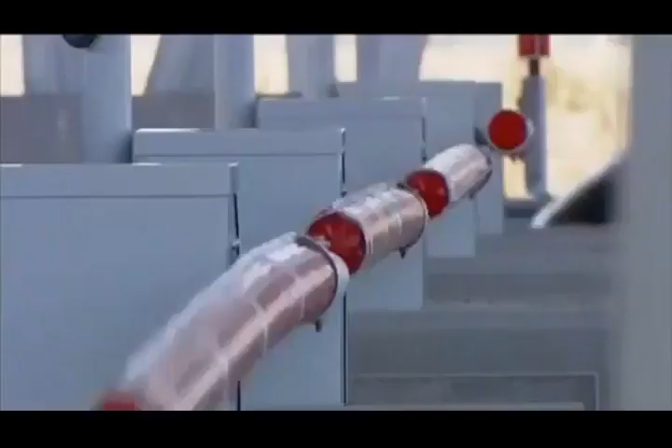As soon as it opened to the public, the bridge was an instant success. But the real test isn't till its first summer, and the French all take their annual vacation. No one ever expected anything like this. Numbers peaked at more than 50,000 vehicles a day. At over $7 per car, that's great news for the construction company, who are clawing back their $478 million investment in the project.

This was an epic bridge to build, but it's just as epic to maintain. Thierry and Frank are assigned to P2, the world's tallest bridge pier. This structure is no solid concrete block. It's a series of vast hollow spaces. Their job today is to test the communication system and electric circuits on each of the 7 structural floors. This involves a 343-meter climb, going hand over hand up a ladder for the rest of the day.

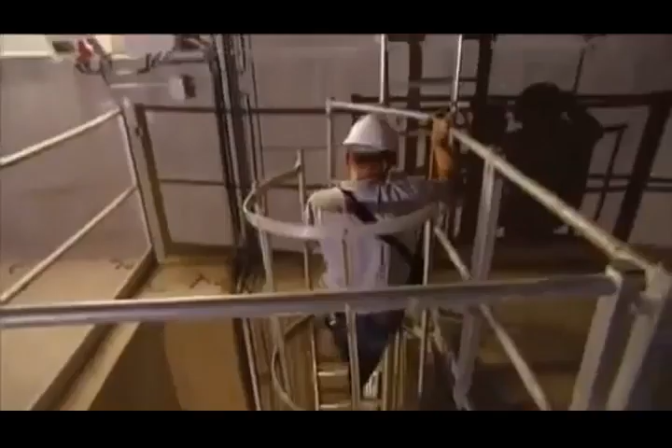By dusk, when Thierry finally reaches the summit of the pylon, he may be exhausted, but there is a payoff. You get a fantastic view from here, a 360-degree panorama.

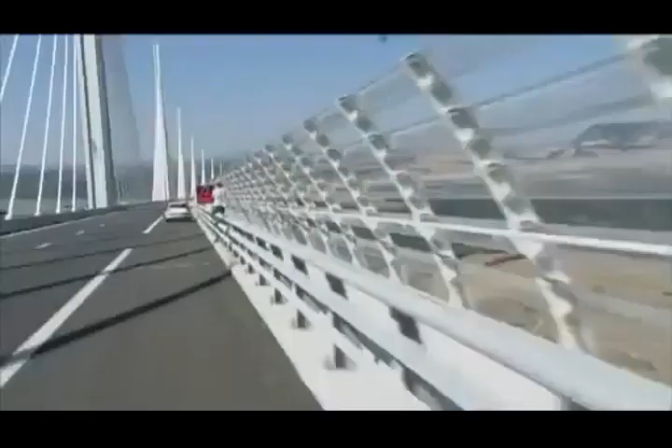The tallest bridge in the world has become an icon. But this is creating problems no one had ever imagined. Locals have been taking over the bridge as a platform to get media attention for their causes. This crowd was hoping that driving sheep over this freeway in the sky would help them get more farming subsidies. When it's not sheep, it's people stopping dangerously, trying to get a unique souvenir of this unique structure. This reckless photographer soon moved on his way, but it's a continuing problem.

You could say the Millau Bridge is a victim of its own success. It's definitely become a major tourist destination. 700,000 visitors in the first 9 months. Fortunately, most of them wait till they're off the bridge to take their photos. It's magnificent. I came 600 kilometers today to see the Millau Viaduct. There's only one thing to say.

It's extraordinary. They're drawn because it's a world-beating structure, but also because it's incredibly beautiful, delicate and minimal. Not what you'd expect from a structure that's nearly a third taller than any other bridge on the planet. And architect Lord Norman Foster's achieved his aim to give the driver the sensation of soaring. As you leave these plateaus, you do fly. You fly across this bridge. Literally, you are above the clouds.

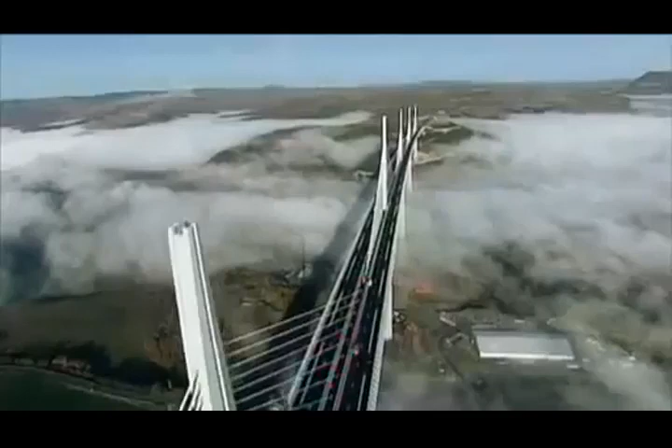And the result certainly pleases the man who dreamt it all up. To see erected this bridge, which I imagined 15 years ago, it's something magic. This is the longest pure cable stay bridge in the world, the tallest roadway in the world, and of course at 343 meters, it is the tallest bridge ever constructed.